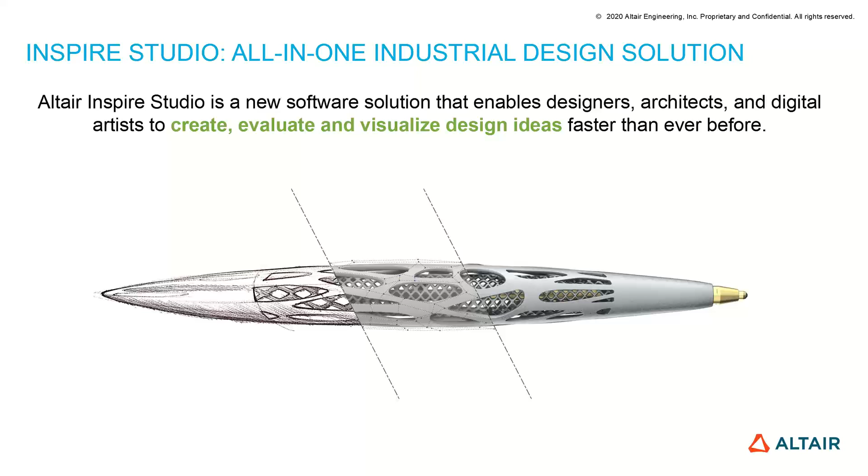It just allows you to create and visualize designs faster than most of the tools out there, leveraging the construction history and a mixture of tools that are available at your fingertips.

Now, you might have heard of construction history before. How is it different from other products out there? Yeah, there are many products that do surface modeling, but what they're lacking is the mixture of all the tools in one program. As I was saying, you can do sketching, surfacing, solid modeling, polygons which is basically mesh modeling, and you can also create renderings and animations within one single program. I think it brings tremendous value for the price being offered, and it'll probably soon go up, so I would probably jump on this offer.

Moving to the program itself, there are going to be a few short videos in the beginning, like this one here, just showing you the interface, but I will jump into it more in depth. I'm going to play this quickly, which will show you the user interface and the way you can edit some options to change your design on the fly.

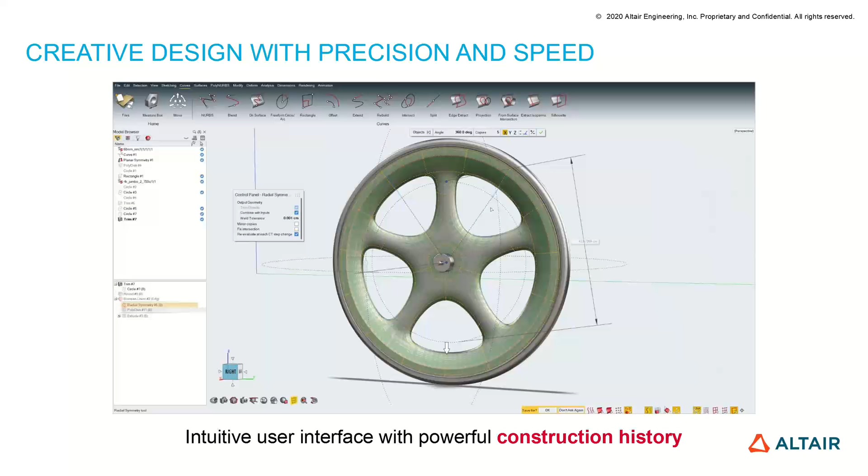Here, one of my colleagues is working on PolyNURBS that have been created in a radial symmetry around, and he's changing the number of spokes and the size and whole shape of the spoke itself. A very quick example, but the main USP here is that you can go back and change things really quickly and intuitively.

Moving on to something else, we've been improving the user interface and the experience since 2019, and it's not done yet. We are really putting in effort to improve it every day. So the images that you see here might look slightly different from what I show you, even in terms of colors and the look and feel.

Here you can see some elements I wanted to quickly highlight. The overall look is more traditional in terms of having 4 modeling views and having your model browser—that's what we call it. You're basically looking at a scene on the left with all the other tabs and windows collapsed, and all the tools at the top. What we're striving to achieve is the ease with which you can access all of these and create the model, without making it very busy.

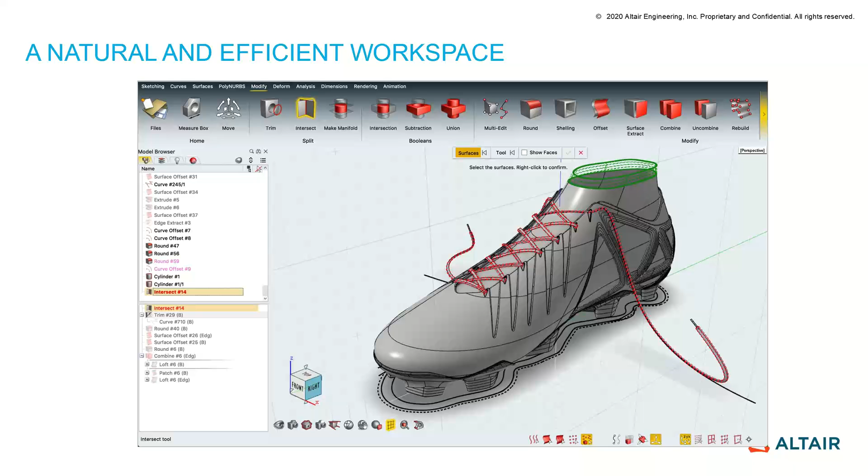I will run you through all of these one by one, but for the time being, we'll quickly jump on to some additional advantages of incorporating Studio in your workflow.

Traditionally, if you come from a background in CAD, you would be used to sketch planes and sketching. So we have included that in the latest version, which was a big step forward from our initial philosophy of just creating sketches in views as opposed to on planes. But we realize a lot of our customers are more comfortable sketching on a plane rather than in free space, so we have added this as a new option.

For those of you who are not very familiar, Studio is actually positioned in a way that it can leverage creation of very organic shapes. If you take other programs, you would probably need a plugin to get this sort of output, but we are placing Studio as one all-in-one solution.

I will also show you how you can use polynurbs to come up with really cool shapes. Here I have another example of a car body that was created completely using polynurbs. A lot of design studios are leveraging this to come up with quick concepts in the first few phases of development, wherein you can edit things on the fly before you actually go and create the full-fledged Class A surface model. This is also very helpful if you're running some aerodynamics tests on these shapes.

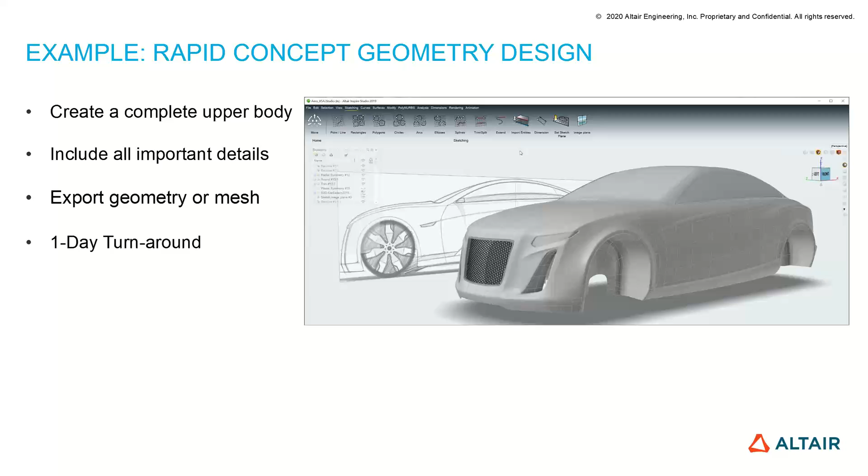We are also working on making it easy for you to export such data into Altair's other products that allow you to run such simulations. So you can really start with the right design at the very beginning.

Here's another quick video showing how we have some specific tools for creating wheel arches and side profile, and how you can build upon that with very specific tools for edge modeling, vertices modeling, and also face modeling. This is an added benefit because you can mix and match these tools. You're not really stuck with a mesh just because you started with a mesh. You can use a mesh along with surfaces and solids, which really brings a different type of advantage because you're allowed to be flexible.

Here, even though he's starting off with a very rough model, you can keep adding details to it, use specific measurements to move vertices or faces around. We also added symmetric modeling here - you can see he's just creating one design feature on one half of the model, and everything updates on the fly.

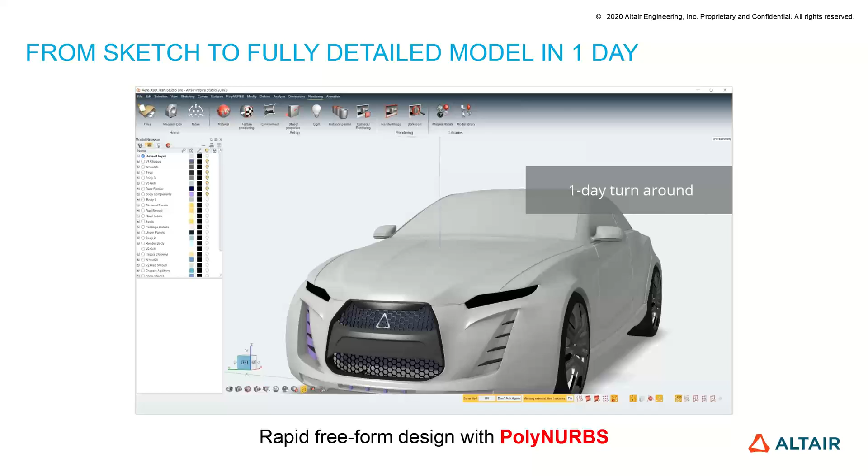This is a very trimmed example - of course this isn't happening at this speed. It's definitely happening fast, but not at this rate. But the result is pretty much instantaneous with construction history, especially with polynurbs, because it's so light and there's no real history in it. It's just moving points based on some underlying curves - here he's aligning it to a curve. We are targeting like a one day turnaround as opposed to several days or even a week.

So let's jump into the program itself. I actually opened something before you got here, but I'm going to keep it open right now. I'm just going to fit some of the scene - I opened it to show you the different kinds of lighting we have. I'll eventually get to that, but the look and feel of the program is very straightforward. All of your tools are on top here, put into something we call ribbons. So this is the surfaces ribbon, and all the surfacing tools are here.

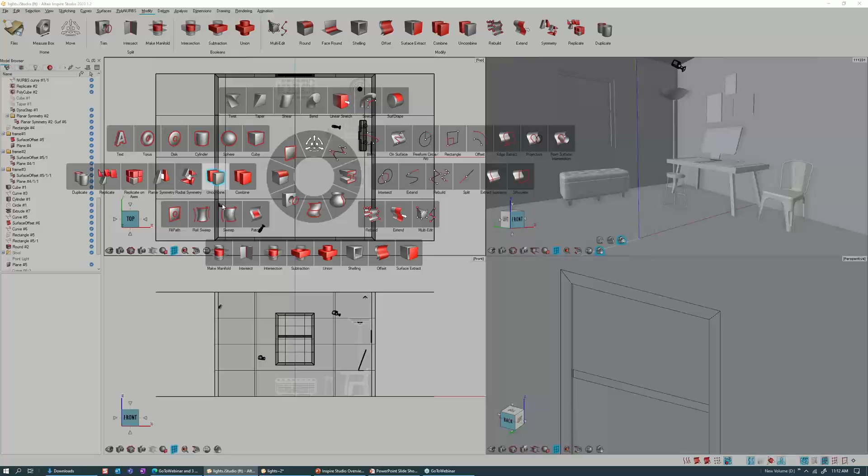If you go to modify, you can see some familiar tools like creating a round or a fillet, or if you call that, intersects and trims. You can also go to the sketching tab, which gives you all the tools for sketching and so on. So you can either use these to figure out what you want, or in 2019 we added something called a tool belt. When I do an alt right click, I can quickly see the tools I need to access. Let me save this and start a new scene.

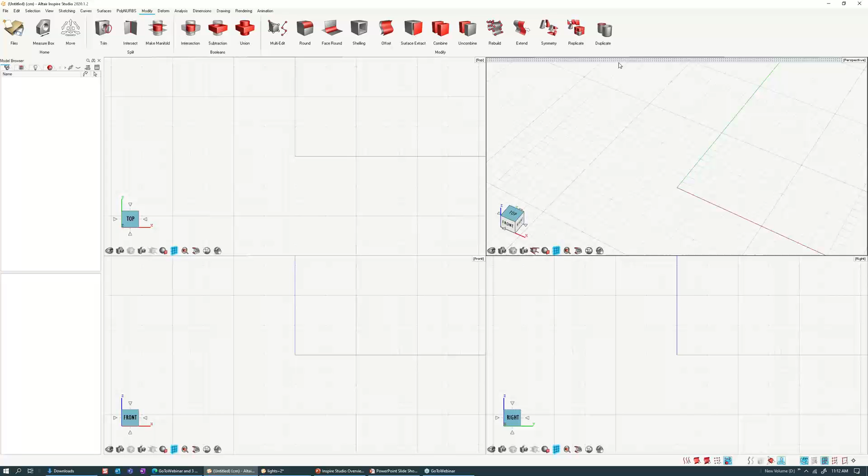As I was saying, the look and feel is pretty much traditional with 4 cameras: top, front, right, and the perspective, but you can pretty much work in the perspective all the time. For example, if I'm here, I can use this cube to switch what I want to see. And if I want to go back to my home view, I just hit the home button.

So you can start with the sketch or even just a basic curve. Here, I'm going to start in the front view. I'm just going to create a circle. You can go to freeform circle and just click and draw, and specify the exact size. So 8 centimeters is fine. Then if you want to create a copy, just Control-C, Control-V.

All of your model, your scene basically sits here on the left side. If you double click on any object, you can edit it. So let's quickly change the size of it, let's say 10. And what I want to do is create a sweep.

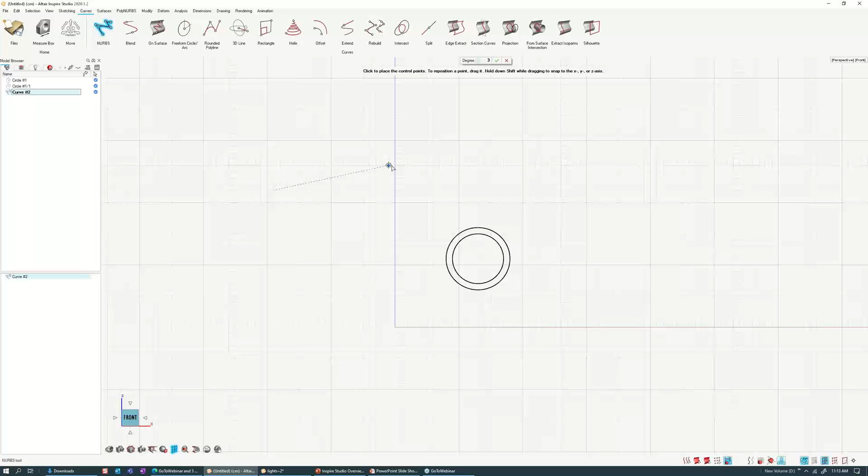I'm trying to create a hair dryer here, so I need a path curve. I'm going to quickly draw a NURBS curve, and I want to sweep these 2 circles along this path. Even though the circles are placed in the front view and the sweep has to go from left to right, everything is going to be fine because we have options to do that.

So if I go to sweep, it's asking me for profiles. I'm just going to select 1 and 2, right click and say path, and select this one. By default it'll try to do something that's not correct, but you can auto align it to bring it to this position here. So you can see that it has created a sweep for us.

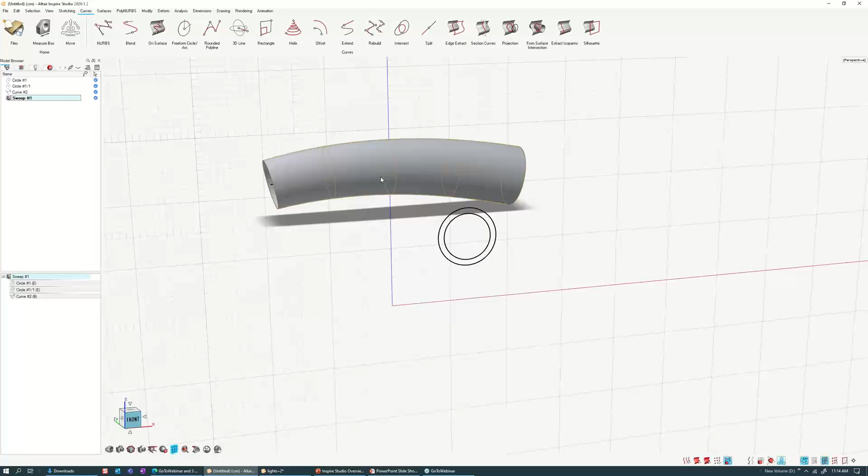When I was saying construction history, it's mainly the ability to change, right? You would want to go back and do something without having to redo it. So here, let's say I want to add another curve, a profile in the middle that's larger than the other 2 curves.

All I have to do is create that new profile. Let's say it's about 14, slightly larger. I want to place it in the middle here. Traditionally, what you would have to do is delete this and redo the sweep again, but not here.

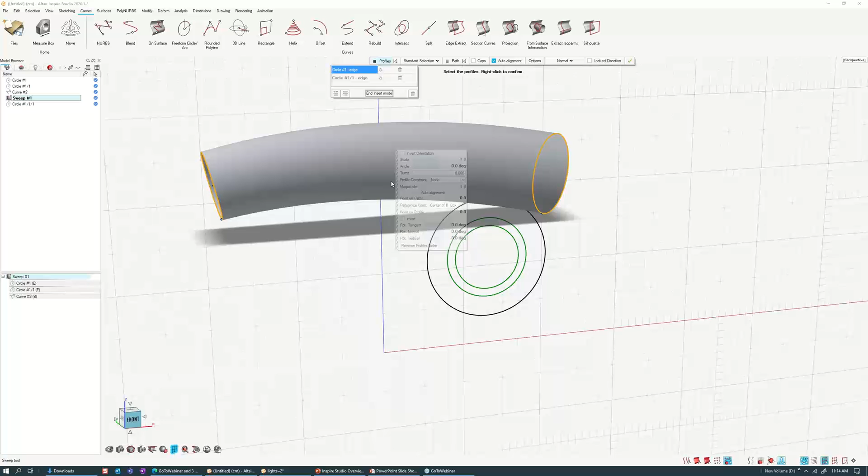You just double click on it. If you go to the profile list, you can see there are 2 curves. I just want to add something in between, so I select the object and say insert after this entity. When I select insert after, I can click my new circle and it's going to throw it in the middle. That's it, I hit the green check mark.

And there I am. I've gone and edited something I already created by inserting objects into it. You can even go and change the shape of the curve, and it's going to update. Let's just make it like this.

I'm hitting 2 on the keyboard for surfaces, 1 for wireframe, and so on. So now that we have this one, let's just quickly do... you can just select these and move it out here.

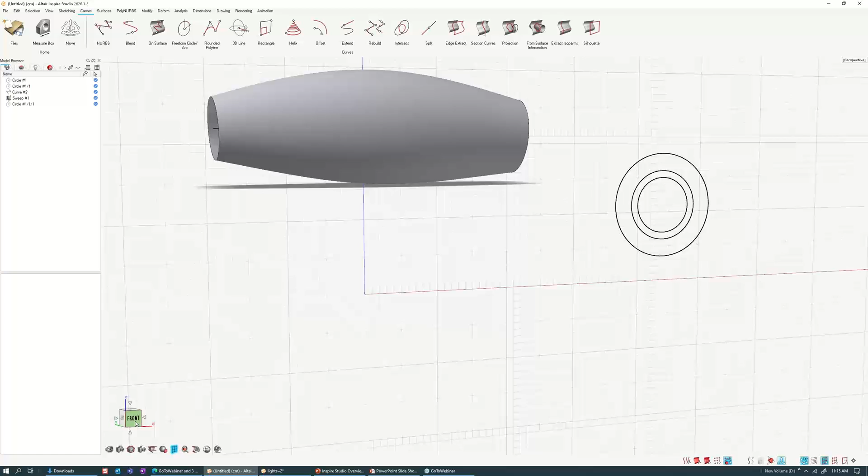Let's start by creating the handle of this, right? So again, for the handle, I would just start with another NURBS curve and throw it in here. Even after you've created something, a NURBS curve, you can add additional points by using these graphic handles. A lot of these are intuitively designed so that you don't have to click additional buttons.

Once again, here I want to sweep something. I can either do a single sweep that will keep the same profile, or two of them. So I'll do alt right click, go to sweep, and select these two, right click, select this one, auto alignment. Here I'm not happy with the direction, I want to just reverse it, so I can do reverse the profiles order.

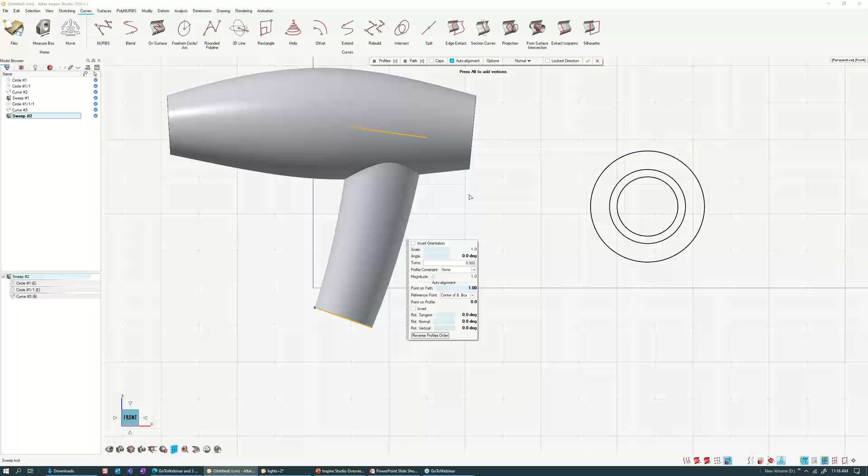So now that we have this one, I'm going to create an intersect. A lot of these tools are available here on top, or you can go to Alt right click and figure it out.

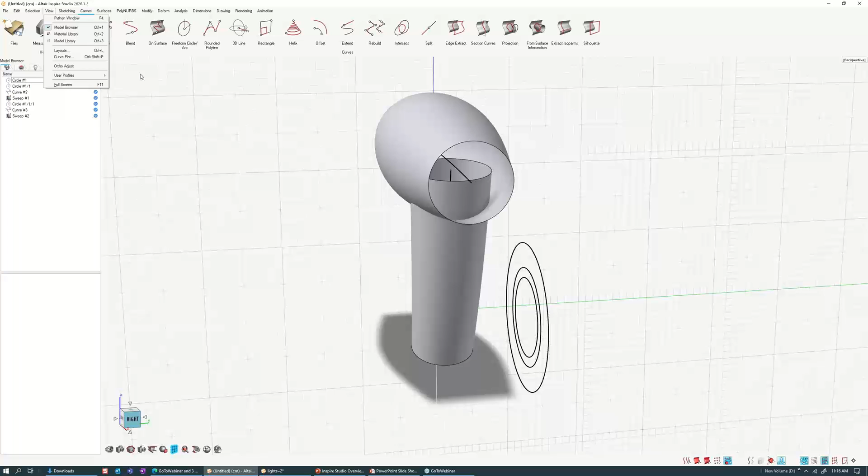If you want to edit the tool belt, you can go to File, then View, and change the tool belt, or go to Help, Customize tool belts. Here we have all the different tool belts, starting with Alt. Shift Alt is for sketching. Control Alt is for polyNURBS, and you can even hold Control Alt Shift and right click to throw in more tools and make it your own.

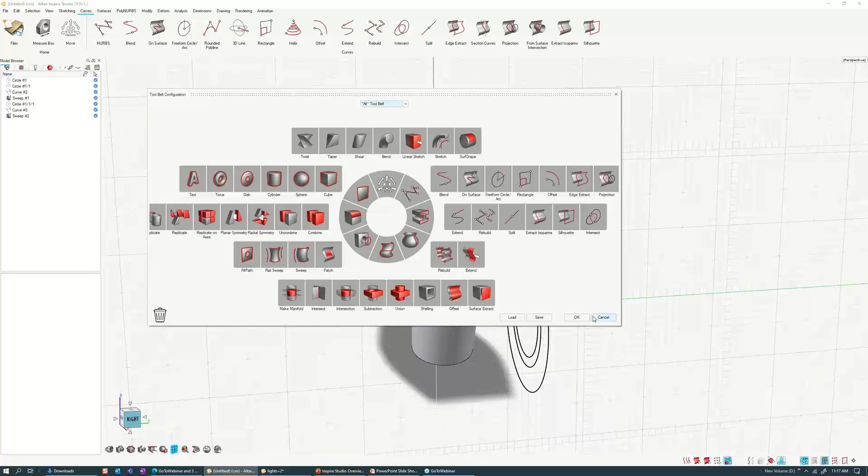At the moment I'll not change anything. It's pretty easy to reorder these, you can just drag them apart. If you don't use a tool very often, you can just drag it into the trash can here. So I'm not going to save it.

So here I am, and I want to do a quick intersection. I'm going to say intersect this surface and this surface. I right click and it shows me what I can remove, and I click on it to remove it. When I right click and swipe, I finish the operation. Some of these objects are created as a single surface after the operation is complete, and intersect is one of them. So here I have an intersect.

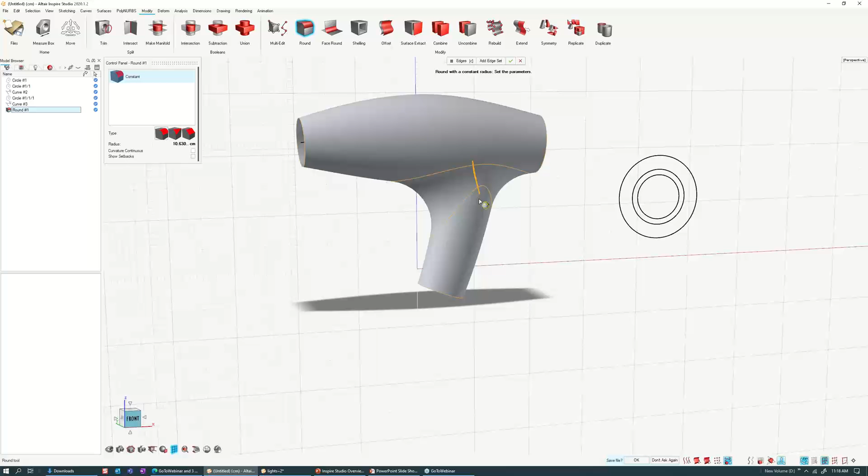Of course there's a common edge here, and I can throw in a radius. I can add one and increase it, force curvature, and now I have this main body that I quickly created in a matter of minutes, and I can change things even after I've created them.

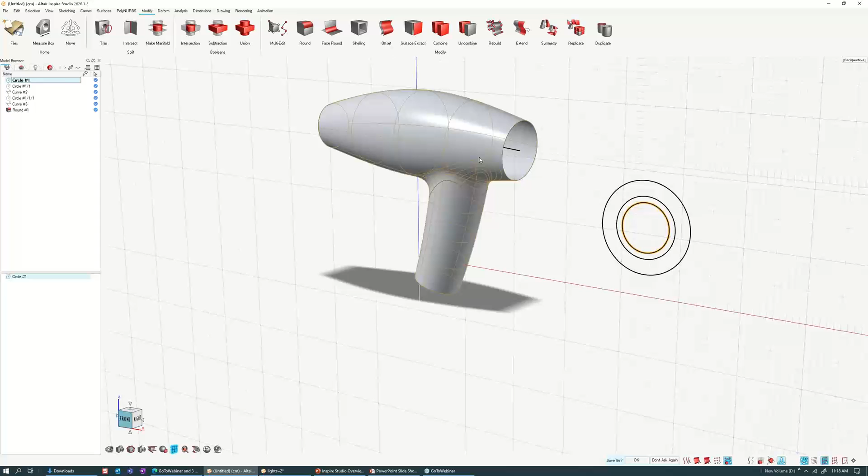When I select an object, on the left side it shows me the way I created it. That's what we call the history, or the construction tree, or parent-child relationship. You can drill down into it to find what you want. Let's say you wanted to change one of the first things you drew, the body of this upper half, which was the first sweep we created.

That's sweep number one. You can go into that and say, I want to change the size of this opening in the front here. All you have to do is double click on it, and it'll tell you exactly where it is. When you type in 6, it changes it here. Or let's say you make it 7. As long as the program can figure out and not break any intermediate steps, it's going to give you the right result.

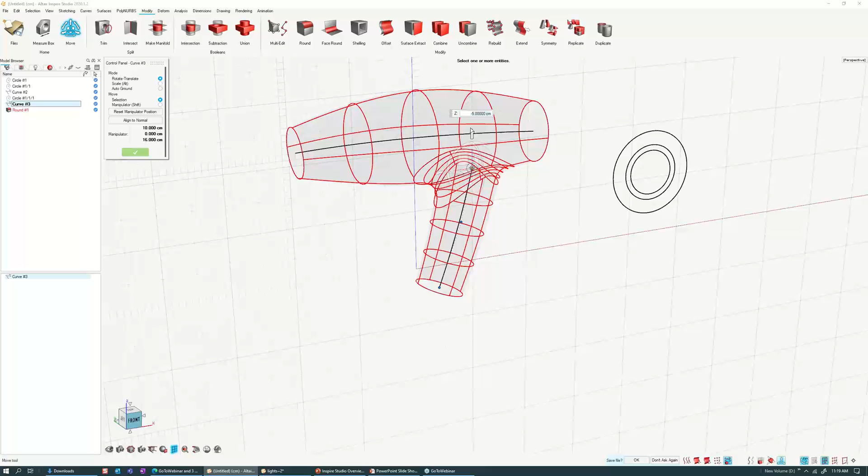But there could be times when it might break, so I'll show you one such example. If we hit 1 on the keyboard, let's say this curve was not all the way inside. If I move it down, at some point the program might break the tree because there's no valid surface that could be generated, but it'll still give you the last valid surface. Here I moved the point of the sweep line much below, and when I select the round, I can see that the round is the one that failed, nothing else.

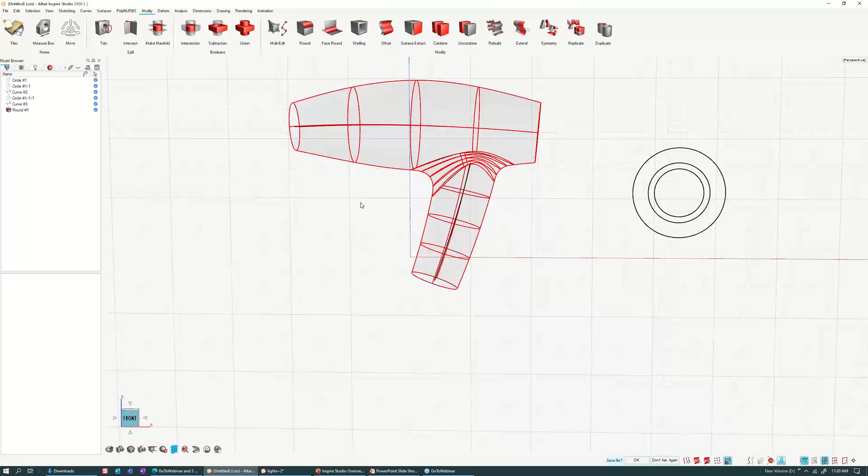I'll have to redo the round, and most likely the fillet failed because the radius size is too much. We can try to reduce it and see if that works. Maybe curvature continuity isn't possible, so we can debug it that way. When something fails, you can easily figure it out in the program itself. I removed the round, and I can add it again if you want.

Let's go to the back here, and this is where I want to show how you can quickly create solids out of surfaces. Okay, so here this is a sweep. I could have closed the openings of the sweep in the sweep command itself. If I double click on the sweep, I have a caps option, and if I cap it, it's going to cap. But in many cases you wouldn't have capped it, or maybe it's not conducive to cap, so you end up with an opening. So how do you close it?

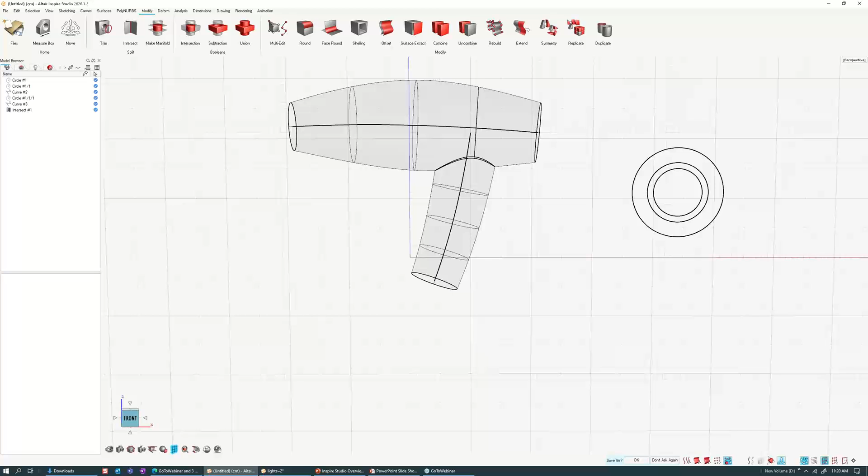It's pretty straightforward, you go to Patch. It's a tool to patch edges, so you can patch this edge, and the same way you can patch any opening in the model. I'm going to repeat the last command, which was patch, and patch this one.

And for the last part, I will patch this one. So let me patch this. Right, so I have these 3 patches that are all surfaces and this main body. So at the moment, this is not a solid object, it's just a bunch of surfaces.

In Studio, you get an option to convert these kinds of layouts, where surfaces are at least tangential and have a closed edge, into a solid. It's like stitching these edges, and that's what I do with a combine tool.

So when I hit combine, just select all of these. So I have this one and this one and the last patch, and I right click. Combine does something pretty cool, it stitches everything and creates a solid as long as there is no gap. It's not some magical tool that will heal an opening. As long as there is no opening, it's going to create a solid.

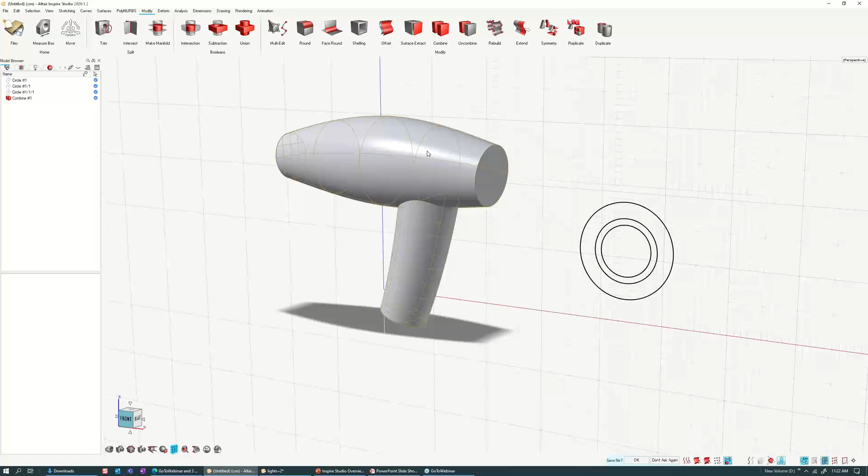So how do we check it's a solid? I would want to trust the program, but I also want to make sure it is closed. In this case, we can go to the analysis tab, which has a bunch of analysis options like drafting, tolerance check, the volume, and some continuity checks. All I want to know is, is it open anywhere? Because if it's open, it's going to cause some problems downstream. So that can be done using the tolerance check. When I hit tolerance check, it says okay, there is no problem, this is a closed solid right now.

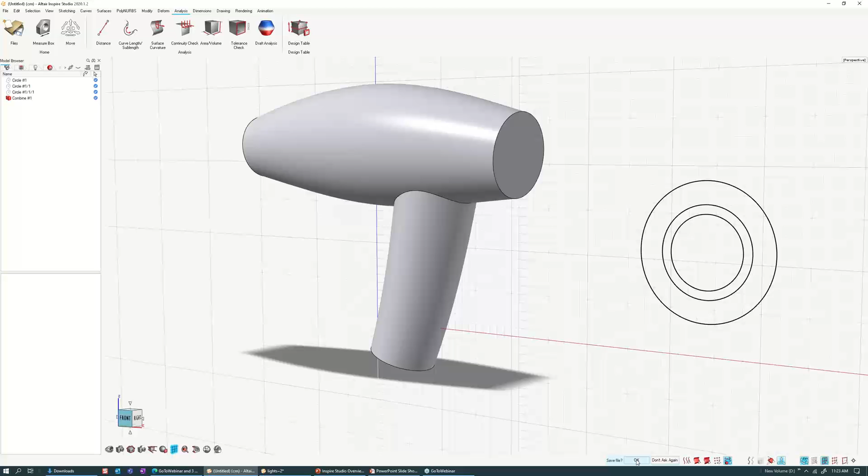So that's the way you would quickly perform some analysis on your object before you move on to the next one. Here you can see at the bottom there's a small pop-up saying you want to save the file, because I didn't save it, it's going to ask me. You can say don't ask me again, or I can just say okay, in which case it will open the last file that I used, and you can save it here.

Some of these preferences can be edited in the file preferences. When I go to general, I have auto save enabled, and a 5-minute time interval has been set. I use this so it reminds me if I start something and don't save it. There's also some safe saving and crash recovery options you can turn on if you're working on something very important, or forget to save it often, or a very large file susceptible to slowness or integrity issues. But at the moment, we are doing fine.

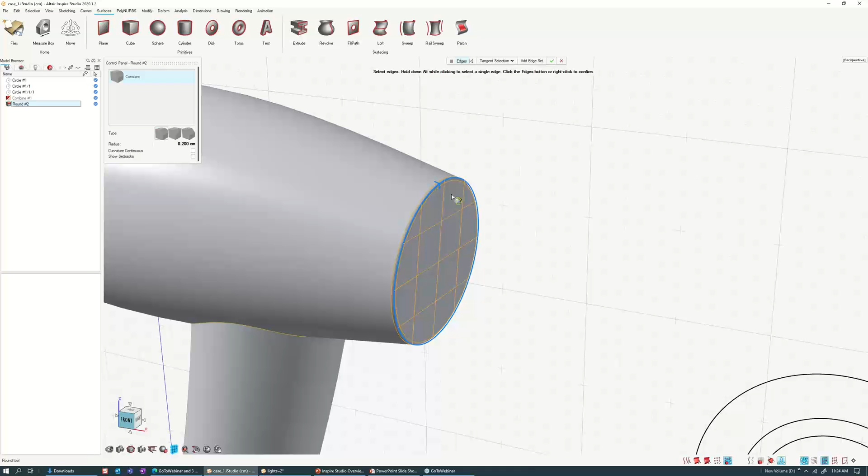So we have the surface, and now you can just think about what else can we do here. I can add another fillet at the back here, right click, and then increase the size. 3.5 is fine. Okay, so now I want to create a pattern, or create some holes in the back here for that exhaust.

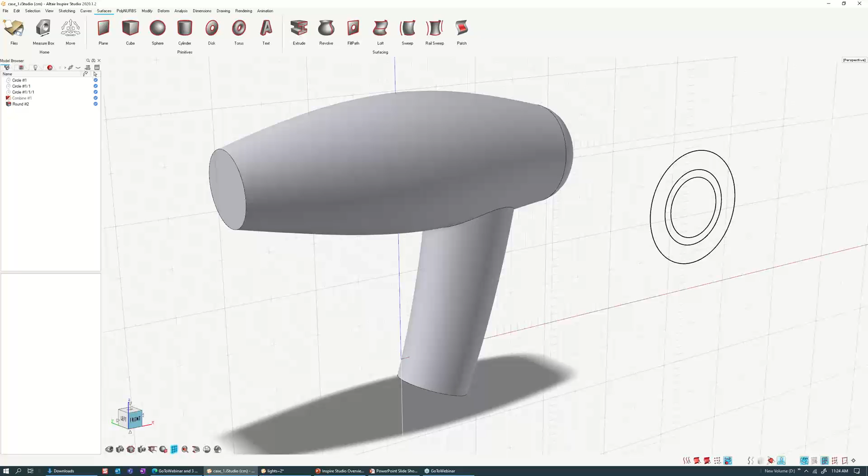So just stay with me here, because first I want to create a shelling of this. Now I'm going to shelling, and I'm going to select this, so it will create this shell for me. If you want, you can even shell this bottom part so it's a complete hollow piece, and you can give the exact thickness.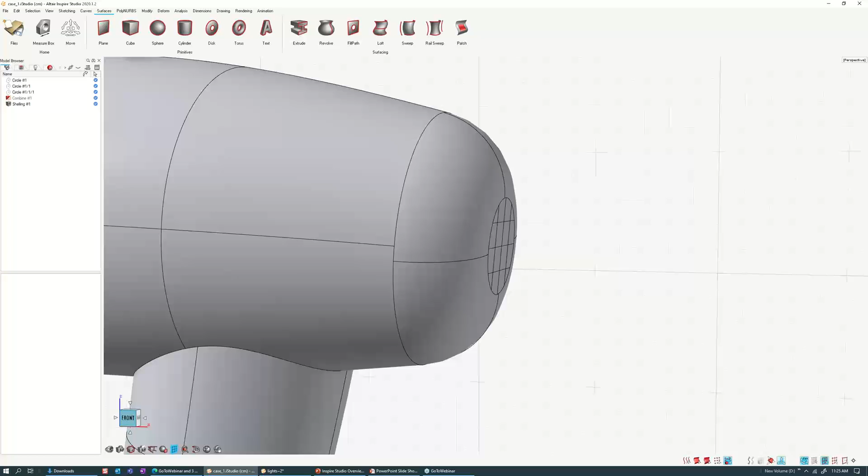And now I want to use this back part to create a pattern, like a circular array of holes. So how can I do that? I just want to first make sure that I can use one of the edges here, so I'm going to just extract one edge here. Let me go to curves, and I can edge extract this one.

So I have this edge that I've extracted, and now I want to create a sphere, just a simple sphere of maybe 1.5 centimeters. So I want to just create a pattern of this along this circle.

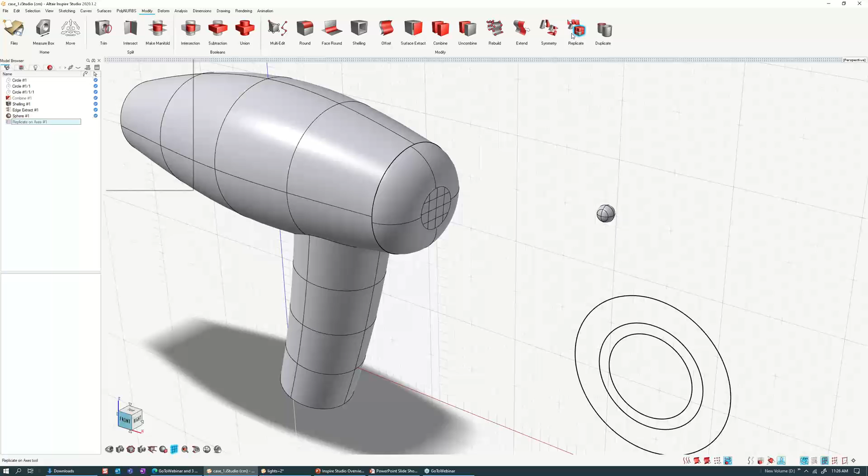So there are some pretty handy tools for replication. I can go to modify and quickly choose replicate, and the object I want to replicate is the sphere. When I do a right click, sorry, I didn't click the path, let me redo that. Replicate object, and the path is this one.

You can see that it creates a replicate along the circle, and I can increase the number of copies like this. And although I wanted the replicates to be further out, I can actually do that by moving the replicates themselves. When I click on this small graphic handle here, I get a chance to move them anywhere, as long as they are within the surface.

So I'm just going to go to the front view. I'm going to turn off the grids here, so I have grid snap. And also, I'm going to disable all the snaps because I don't want snapping to work at the moment.

So I'm just going to pull it out here and right-click swipe. I want to make sure this is a combined output, otherwise all of these will be separate spheres. So I'm going to combine the output, and there you have a quick replicate.

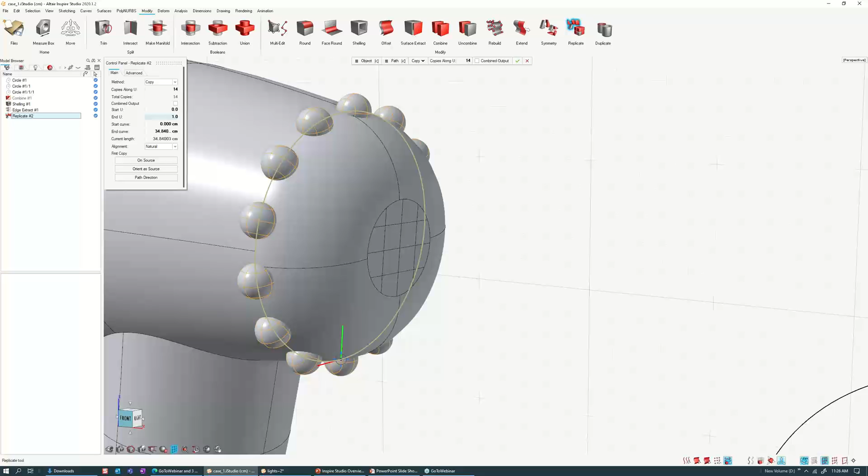And now I can do a Boolean subtraction. This is where solid modeling comes into play. All this while we were working with surface modeling. When we created the main body and shelled it, it became a solid.

So from now on, we need to use solid modeling techniques. I'm going to do a subtraction. This surface, right-click, and objects are this one, and it's going to create a quick subtraction of this one. Again, there is no reason why you just shouldn't be changing this.

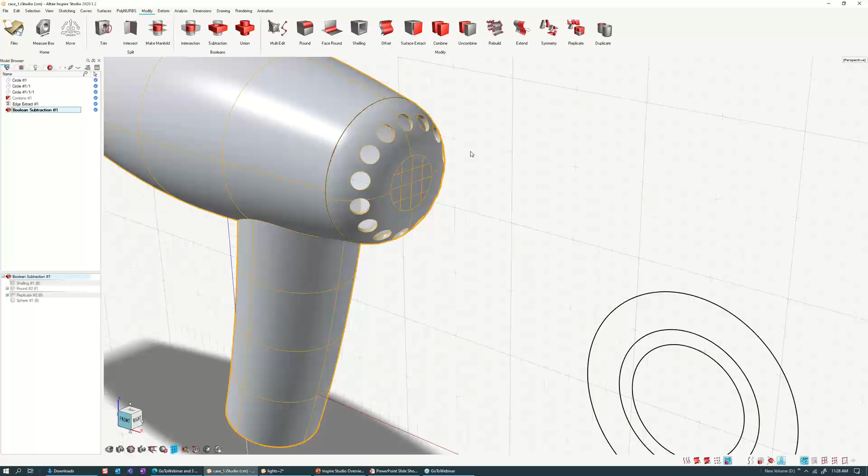I feel like changing it now, so I'm going to go to the sphere. I'm going to change it to 1. It made the hole smaller.

So now I just want to change the replicate. I'm going to double click on the replicate and change it to 25. So now it's going to make all of these changes without any problems.

But now if I change the size of the sphere, of course, it's going to create some problem because it's going to merge all of these holes into one.

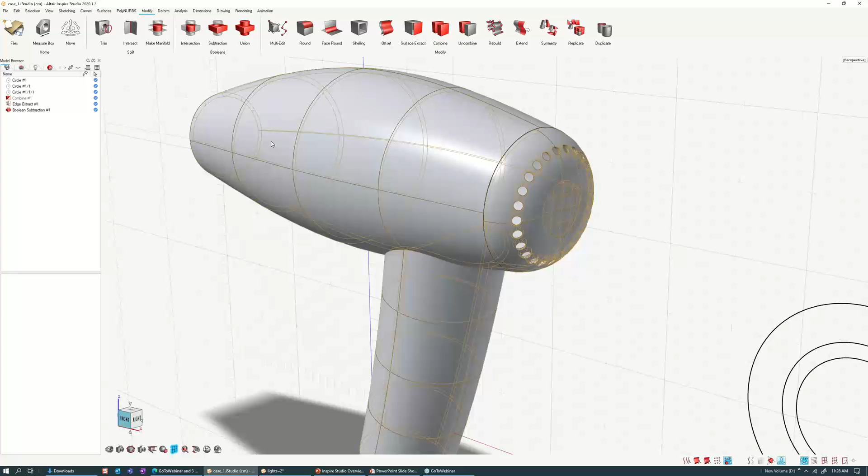Now, if you look at this model browser on the left side, it looks like, hey, where are all the objects I created? It looks like there are only 5. So what we are trying to do here is to keep a very clean look by showing you only the top level objects.

If you come from the previous version of Studio, which is Evolve or Solid Thinking, you're used to seeing a very large tree that is chronological, which means we just keep showing you everything that is being created in the scene, no matter where it is in the tree.

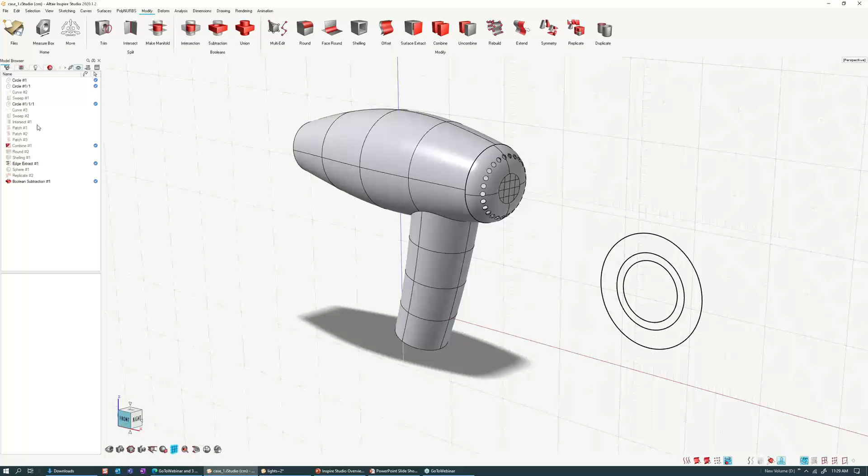If you're somebody who likes to see everything in your scene, you can just click on this Show Hide All Source Objects. When I do this, you can see everything you've created so far. It's chronologically placed, so the Boolean subtraction is the last thing you did. But if you turn it off, it's going to be the last thing you did, but it's not very clear what all surfaces are being used, or what curves were used, and so on.

So this is just a quick way to show you how you can do surface and solid modeling. Now let's jump into sketching quickly. So here I'm going to the front.

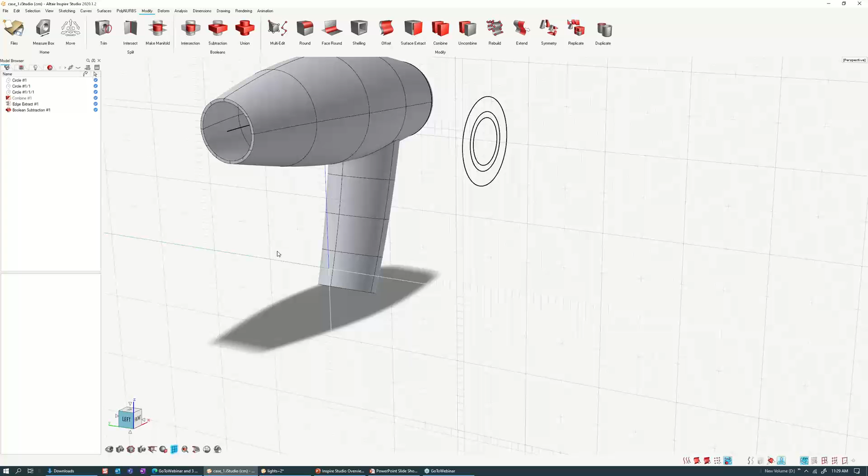I want to sketch something here in the front, right? So I'm going to sketching, and you can just start sketching by creating a sketch, but let's start with just a square or a rounded polyline. Either one is fine. So I'm going to start with a square, rectangle, and I'm going to choose the front view.

Sometimes if there are objects in the way of your mouse pointer, you can always just move them out and then select it. So here I'm going to place something along this center line, like this.

You don't have to fully constrain sketches in Studio, so that's not a prerequisite, but if you're somebody who is more comfortable doing that, you can constrain it.

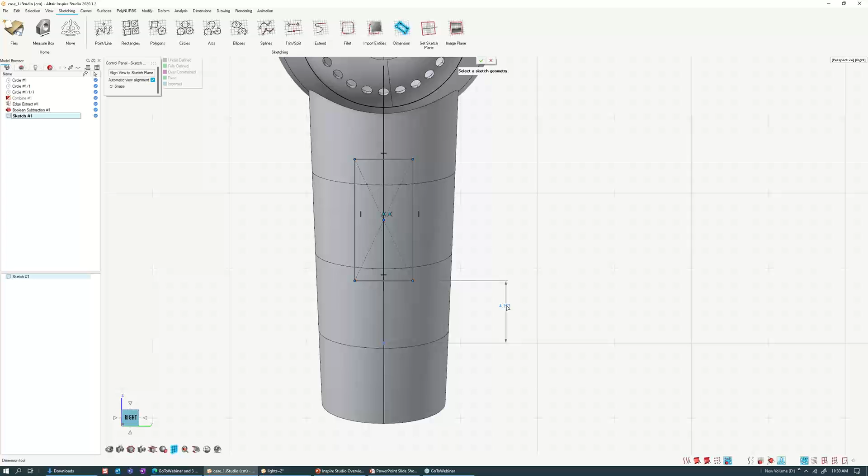So let's say I want this to be 4 centimeters from the bottom, and this is like 1.8. Let me give the size of this, make it 2.5.

I apologize for any screaming and shouting that you might hear, because my son is at home.

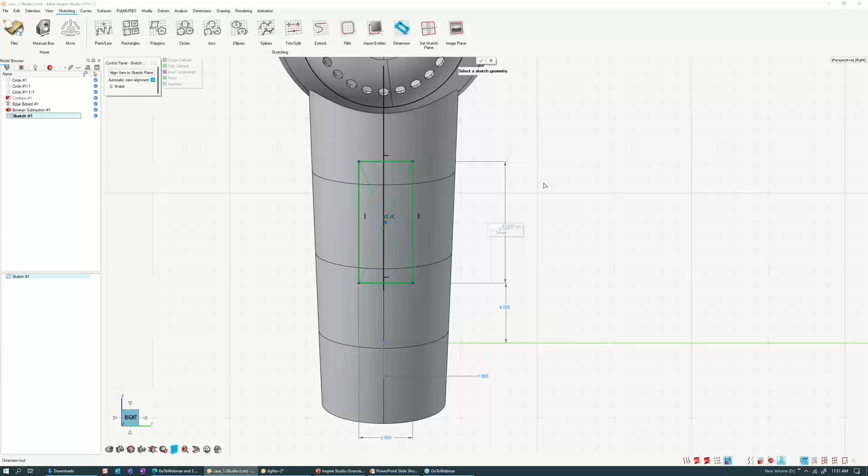So here I have, let's make it 6. And the last thing I want to do is align the center point with the axis, so I select both of them.

I'm going to delete this 1.85 because that won't let me align it. So I'll select the center of this square, hold Control, select the origin, and make it horizontally constrained. So now I have all of these.

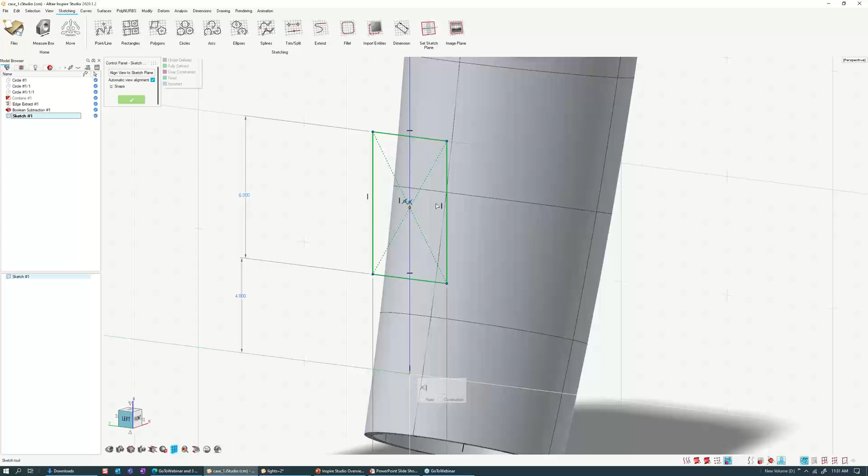This main sketch here, I can add fillets to this sketch itself using the fillet option, or you can add fillets to the surface. Either way is fine. I'm going to show you the latter.

So here I want to create a trim of this. Let me use a trim command with the sketch. I'm using sketch with a solid object. I used curves before, so I'm just going to do this, and a trim by default will go all the way through.

So here I can see it's gone all the way from the front and come out from the back. I don't really want that. I want it to stop here at the front. So the way I can do it is say, give me just a custom distance, I don't want the whole side, I just want a custom distance, and I can specify it by pulling this arrow inside.

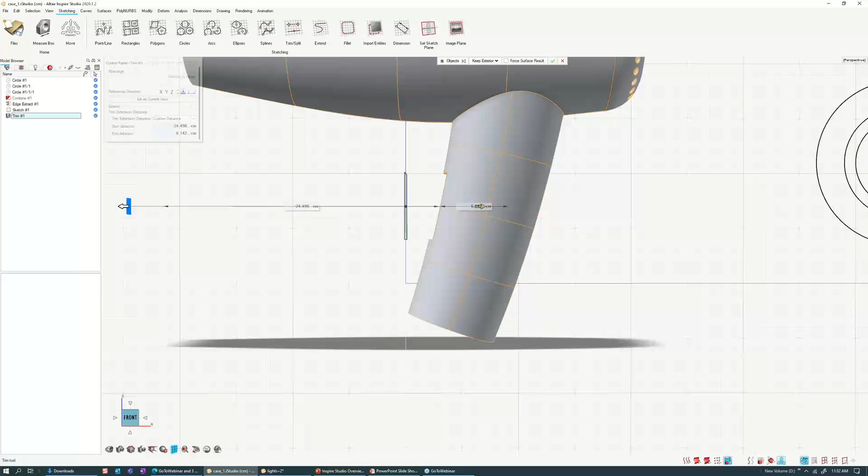So I'm going to stop at 6 centimeters from the point here. I'm going to keep the exterior, and there you go — it actually created a trim that didn't come out the other side.

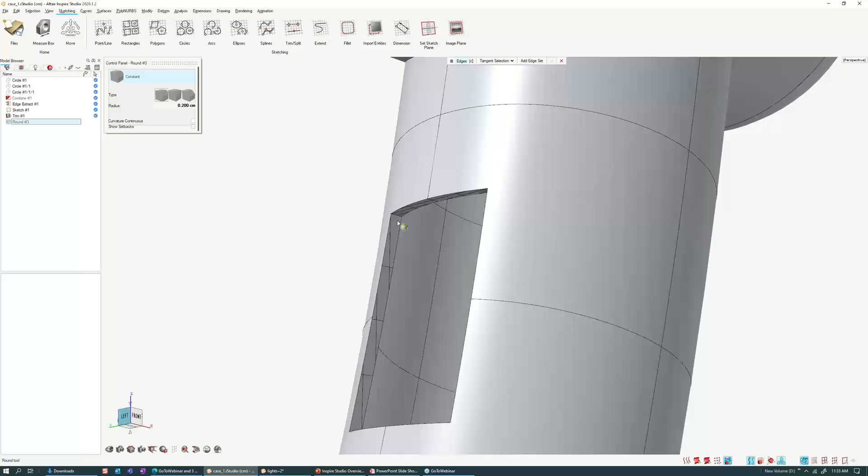In some cases, I'd like to turn off the grid because it gets busy. So I'm just going to turn off the grid, and you can add fillets to this part now. You can just go in here and add a fillet here.

If you did not want to do this, you could have added fillets to the sketch instead. So let's step back. I'm going to hit delete, go back here, and in the trim sketch I'll just say give me a fillet for all of these, and exit from the sketch — and boom, the trim updated even before I exit the sketch. So this way you can use many of these techniques.

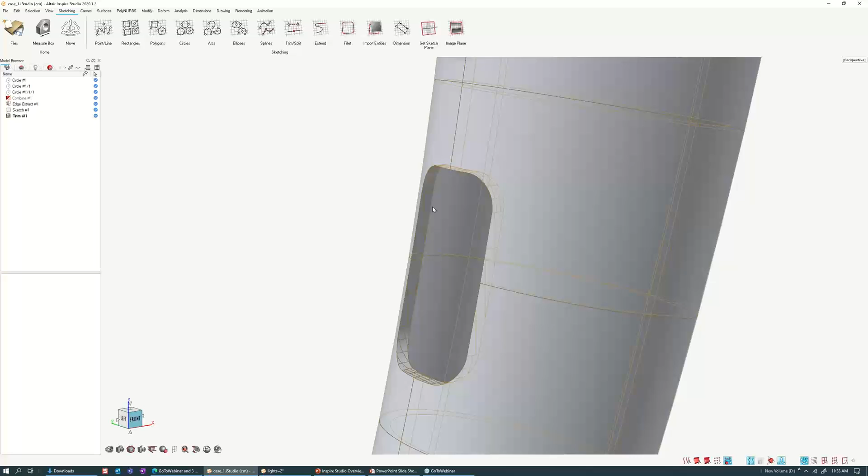Now I want to close this opening again. As I said earlier, I can use a patch here, and I select this edge. If you have internal curves, it can create something, but at this point it can't really fix this because there are no internal curves to guide the continuity.

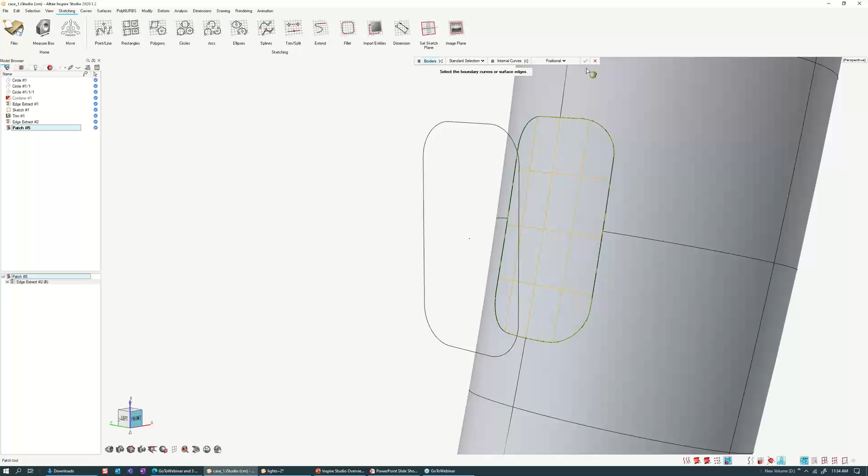But if you create some curves there, you can also patch that. Let's do an edge extract on this instead. Okay, so I created this edge. I'm going to hit Q to bring it back, and now if I try to patch this, it should give me a patch — so I could patch the edge even without any internal curves.

The reason I did this is because eventually you could create a switch here that will control the speed of the air coming out, and so on. We have a very similar tutorial in the pack, so you can run through this very easily.

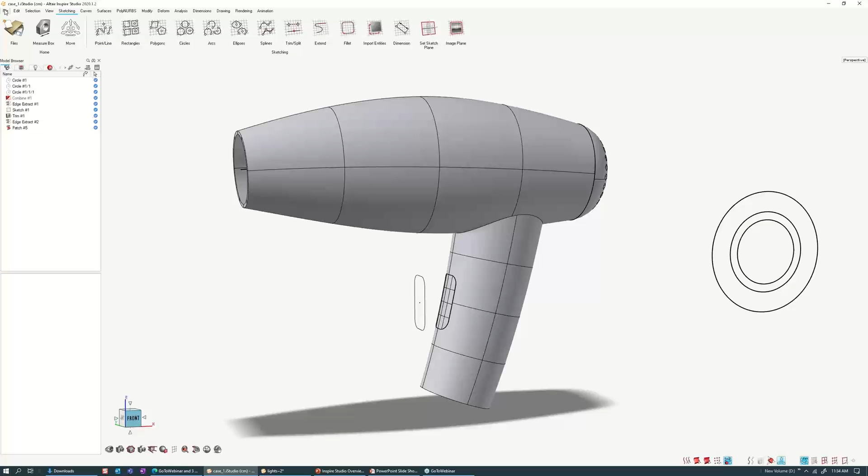Let me open that, I'll show you where it is. If you go to File, Open — let's go to Program Files, Altair — okay, I think it's in the documents, sorry. It's in the scenes folder. I'm sorry, I can't really remember off the top of my head, but it's one of the tutorials that goes through this.

So let me jump into the next part, which is the polyNURBS aspect of it. Let's say you want to create something in the front that is not a surface or solid technique, but more of a polygonal modeling approach. So you can go to polyNURBS and start working with it.

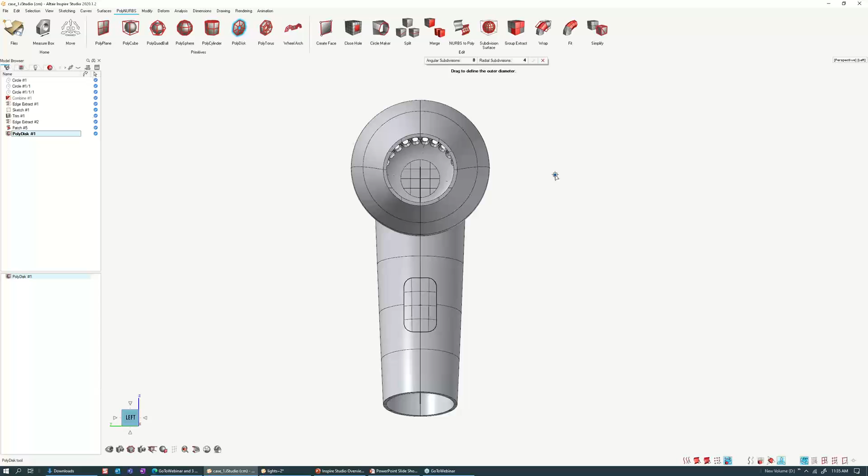So I'm going to start with the poly disk. I'll bring back the grid here, and with poly disk I'll say give me grid snapping 2, and I'll create one disk like this. Let me bring it out — so I have a disk here, and now I am working in edges, vertices, or faces.

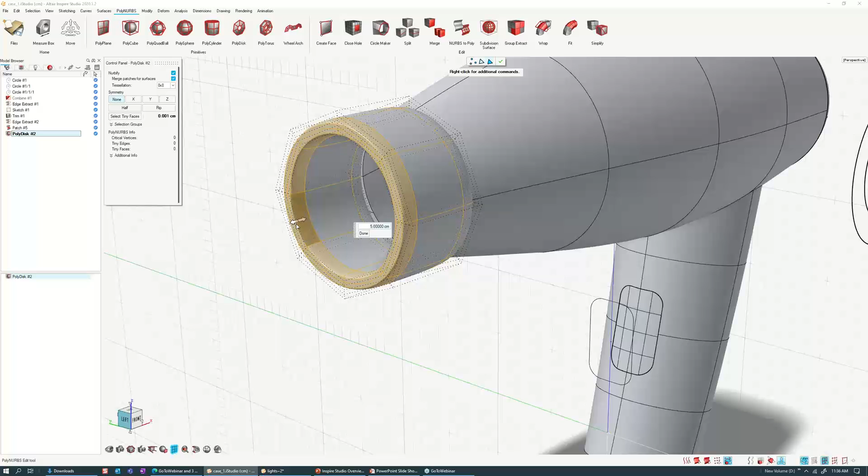So I can just select all of the faces and extrude them. I'm holding shift to extrude it, so I can extrude it like this once, and extrude it once again. So now I have these vertices that I can work with.

I'm going to right click swipe, hit A on the keyboard, and I can scale these now. So I'm going to select these top vertices, and use some of these handles to drag it down. Let me zoom in a little bit so I can just push it down, and then use this one to pull it up. Then select all of these.

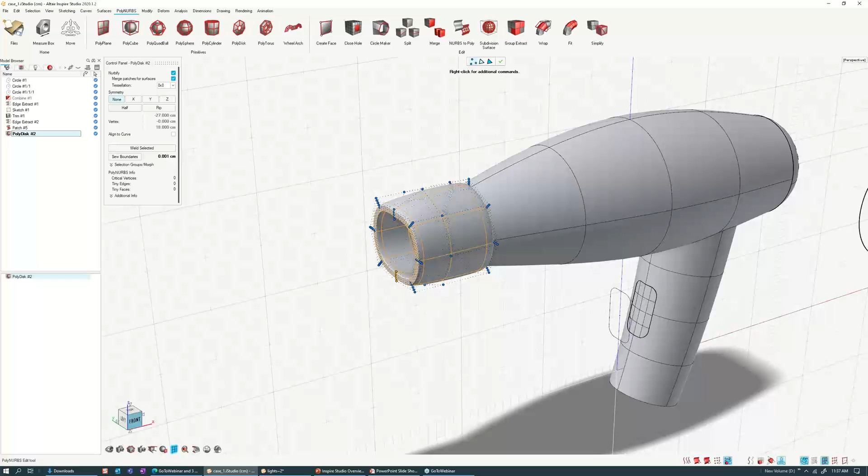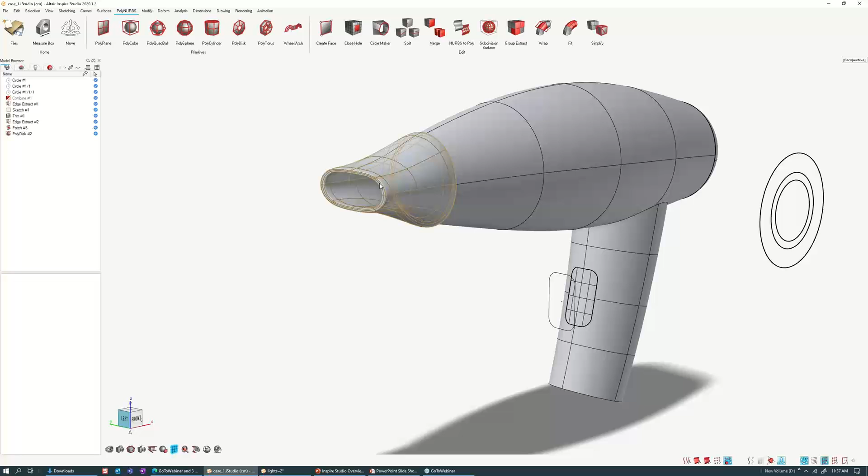And use the scale button — sorry, Alt to turn on scale — and I can change the shape of this. I can use polyNURBS to do this because it's much faster than creating a curve and sweeping it, and it gives me more flexibility. I can select only the front faces, the front vertices, and do another scale, now only in the Y direction — selecting this Y axis and scaling it.

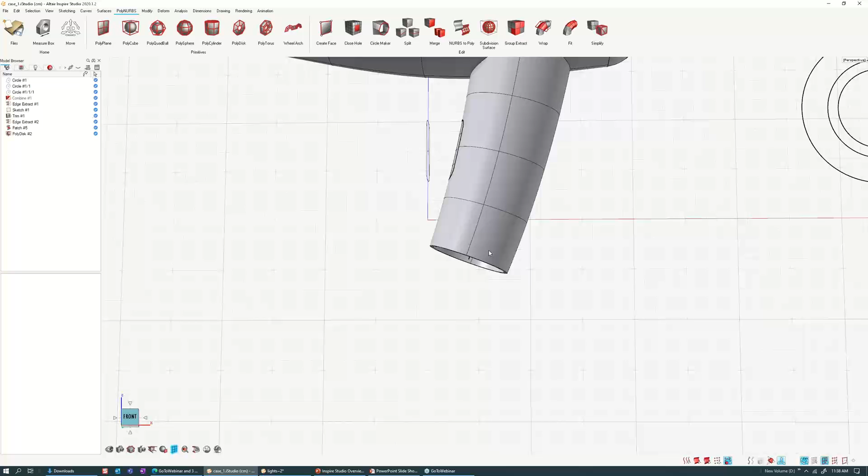You can control more of these with precision if you want to move it. So now that we have this, let's go ahead and create some other forms of PolyNURBS too. In this example, I can probably show this one, but there are some additional examples which I can show you where you can create bridges and so on. So let's save this file and move into something simpler. I'm going to start a new scene.

So here I have PolyNURBS, right? Again, with PolyNURBS, what I'm going to do, I can pretty much start with either a cylinder, a PolyDisk, or a plane. So there are many options for you to start. Let's start with the PolyDisk, as we did earlier.

Now I won't give an inside radius, so it'll be 0. If I hit D, I can right click, select all, and then I can just extrude it. So here I've extruded something, but it's just very soft looking, right? It looks like a pillow, but I want to make it sharper.

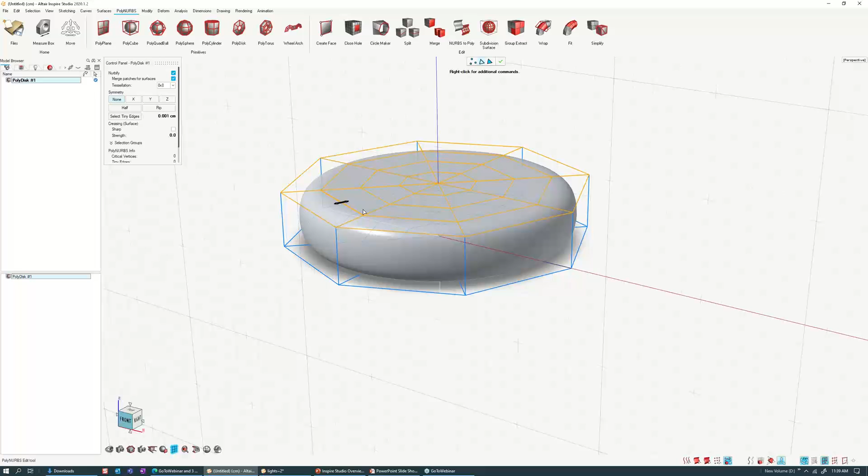So I can go to edges mode. I can select the outer edges using Alt. Here I can add a sharpness, or I can even increase the strength. Let's make it stronger like this.

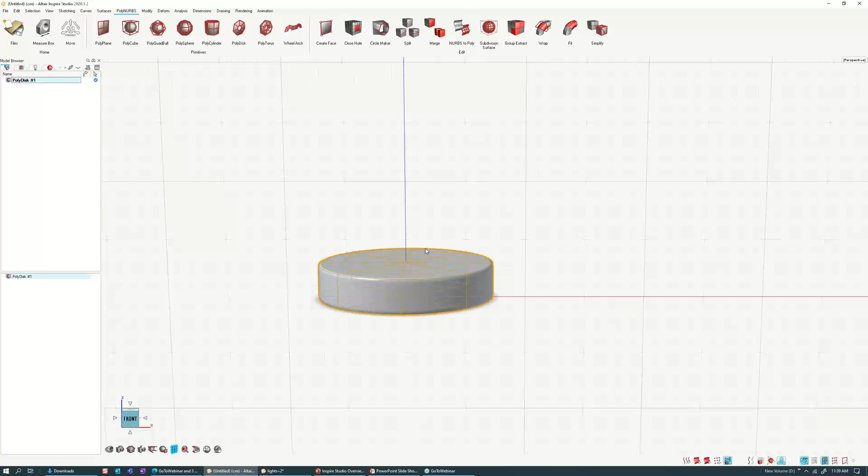And I'm going to make a copy of this - it's basically another PolyNURBS - and move it up here. And I will hit A. I'm creating something like a coffee cup with a coaster.

So it's built in. I can just move it out and go to scale. And if I want to scale it uniformly, I can just click in this XY plane and do like 2 or something. So let's scale it by 2.

Now I want to add some vertices here, right? Nothing is there between this top and bottom. So I can do add edge loop here, click and draw an edge loop. I'm going to drop one here, and say one here.

Now I want to just scale these slightly. So I will do the same thing. Go to move, then scale it, but this time I'm going to scale it by like 1.25. Okay, so I have this one.

Now I don't want the opening here - I'm sorry, I want an opening here. So how can I do it? I can delete some of these faces here.

So right now we are looking at it in a NURBS-ified mode, right? It's not like a mesh. So if I hit N on the keyboard, I can actually see how it looks in a mesh format. So this is how it would look without smoothing.

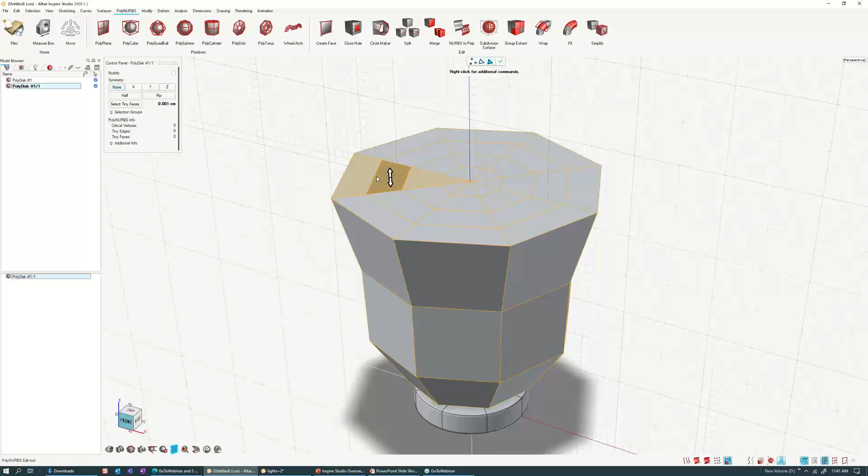So now I can just select some of these surfaces, and I can just hit delete. I'm going to just select some of these. You can even go to advanced selection and then just select the loops like this.

So there are some handy selection filters that will let you select multiple edges with just advanced selection. When you're done with advanced selection, you can turn it off, and in the main window, you can just delete it. Right, so now we have an opening, and I'll hit N again.

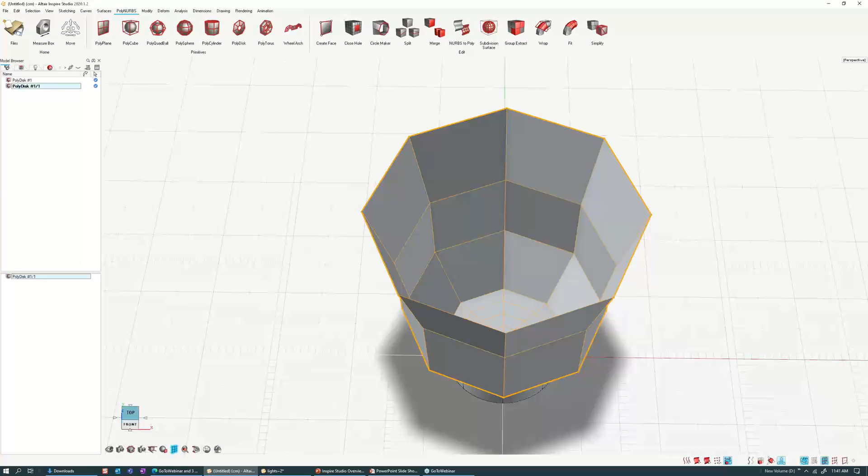So now I can select all of them and give them a thickness that I want. I'm going to just click and drag it. Let's say 3 centimeters is fine.

There was some skewness here, but I think we can manage. So I'll hit S, and you can see this edge has still retained the sharpness. So I'm going to turn it off, right?

And now let's say I want to merge these two PolyNURBS together. I just need to add them to the single object. So I'm going to merge this one and this one, so they become the same single PolyNURBS object. And I can just start by adding one more loop here.

And I can start by pulling this edge out. So basically I want to draw a handle that goes out and goes into this bottom portion. So I'm going to select both of these faces using Control and just pull it out. But you see there's a problem here.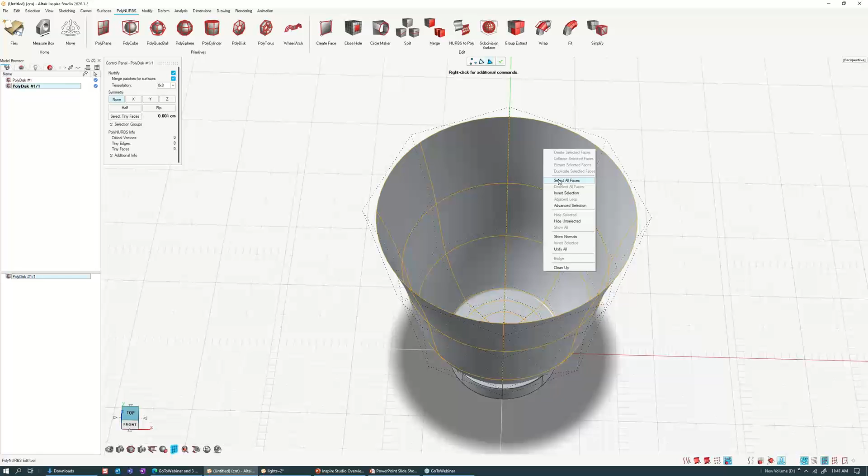The normals are reversed. So I'm just going to Control Z, then right click on this one, go to faces, select all faces, and then right click and say unify all. That means we'll unify all the normals.

Now I can do what I was showing you earlier, which is select two, and it has not done it. Anyway, so the normals have to be unified. So I'm going to just start with this bottom portion here, just pull it out,

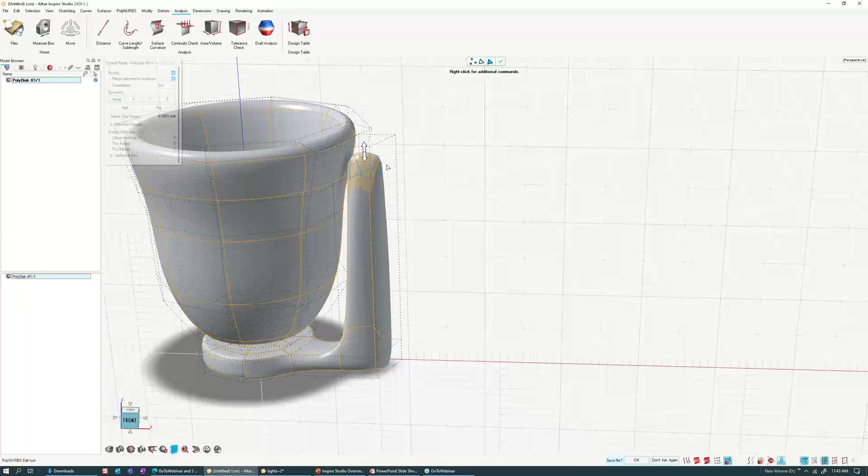and then bring the top part. We can add some more details later. So I'm going to just select this face, hit W, and just move it out. One more extrusion, and now I can just bridge this face, the one on the inside, hold Control with this, and then just bridge it.

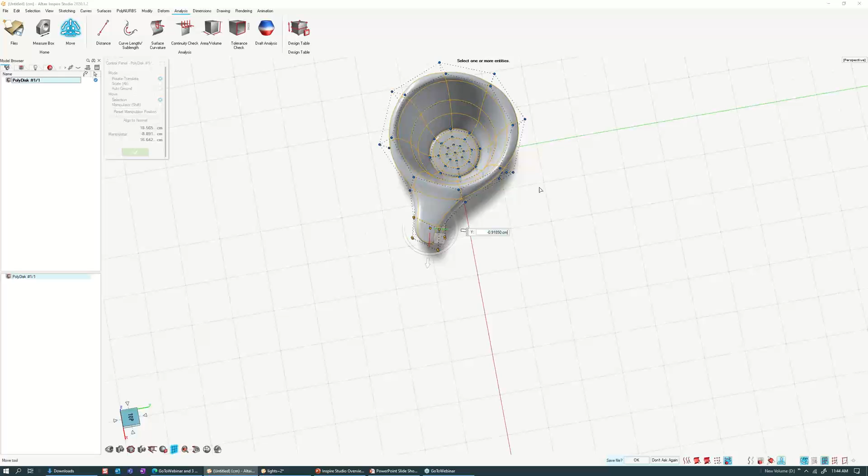So basically what I did was, although it looks a bit skewed, I can just edit the points and rotate it if I want to fix this. So anyway, the deal was to quickly come up with some designs using PolyNURBS, and this is just one example where you can do it. And the last part I wanted to show you was basically the rendering, the built-in rendering.

So I'm just going to quickly open another scene.

So here I have a scene that has multiple kinds of lights. I have some cameras that are set up, and it's basically a room.

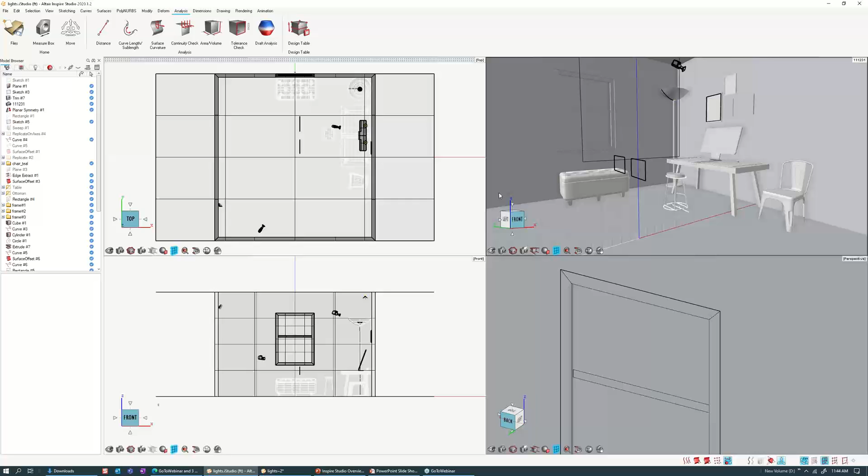I'm going to hide the curves using Q, and this is surfaces mode. When I hit 1, I'm in wireframe. 2 is surface. 3 is just a matcap, as we call it, and you can change the material cap. 4 is zebra, 5 is real-time rendering, and 6 is when you can actually look at the interactive rendering.

So I'm going to start interactive rendering. Real-time will just quickly give you a look at the materials, but if you really want to see a realistic depiction, then you can go to interactive render.

Depending on the graphics card being used, it's probably going to be faster or slower. So right now if I go to my camera and rendering, I have an RTX 4000, and it's probably the best bang for the buck. You can even use gaming cards if you have one.

Here I have OptiX denoiser enabled, so you can see the scene is a bit blurry because it's just running denoiser even in the interactive rendering portion, and it's still going to keep improving this part. You can turn it off here if you want, but then it'll just be the usual grainy way of improving.

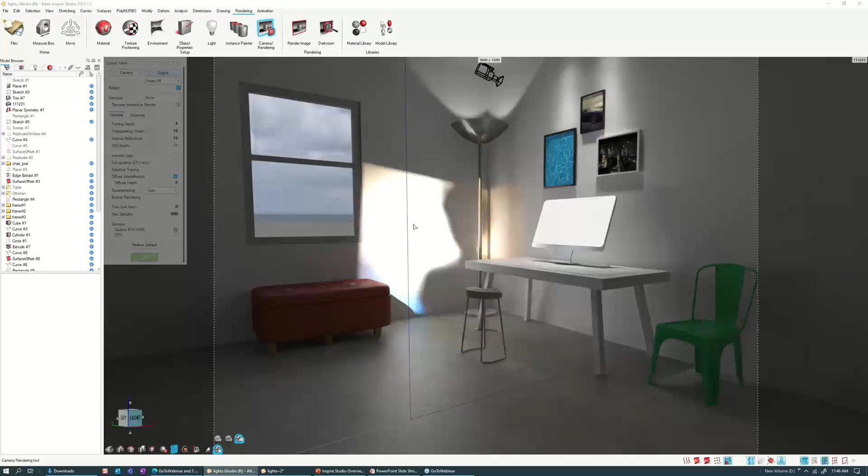So here I have already rendered the scene. I rendered it once, and I also did something called relight. In relight, what happens is you can have multiple lights in the scene, and you can turn them off and on, depending on what you want.

So here I have one light coming from the outside, which is the environment light. I have a projector light with an image of a person, so it makes it look like somebody standing. I have a regular light that is like this lampshade, and I also have a monitor that is supposedly just emitting some white light, and I have some IES lights on the top, which are manufacturer specific.

So let me go to the base scene, which is more of without the materials, just to show you how the light is going to change based on what I turn off and on. So even though I've closed the program, I'm in a different program called Darkroom, which is part of Studio. Let me just show you that.

So even though I'm in Darkroom, I can load a scene that I've rendered already. This was a scene I rendered a while ago. If I hit this, I can see the information that it was rendered in 10 minutes with 500 samples. So these are all you can set.

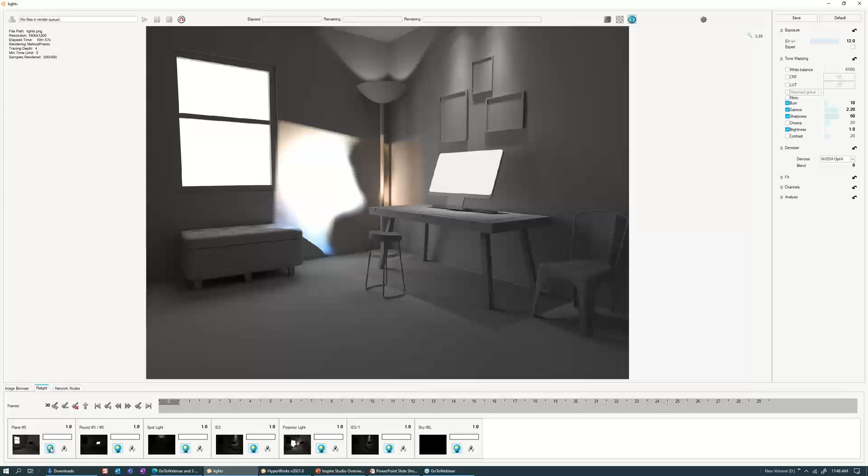Let me jump to relight here. And in relight, you can see all these lights at the bottom, right? These are all the different lights I have on the scene. You can either make each one of them turn on and off separately, or you can even make one of them solo.

So I'm going to go here and just say, make the projector light solo. When I do that, it's going to turn off all the other lights and give me just the projector light. Same thing with, let's say I want only the emitter from this window, and everything else is turned off. You can turn on lights, and if you turn them off one by one, you can even create whatever scenes you want.

So the point here is that you can add these images into the timeline. Here you can see there's a timeline. So at frame 1, I can add this, which is basically the IES light and the emitter light. I can go to frame 10 and turn off the IES and turn on the projector and add it to the frame. So I can create this kind of animation of lighting to show your clients how the room or the scene looks with different lighting. So it's not just artificial lights, you can also add sunlight and environment lights using image-based lighting.

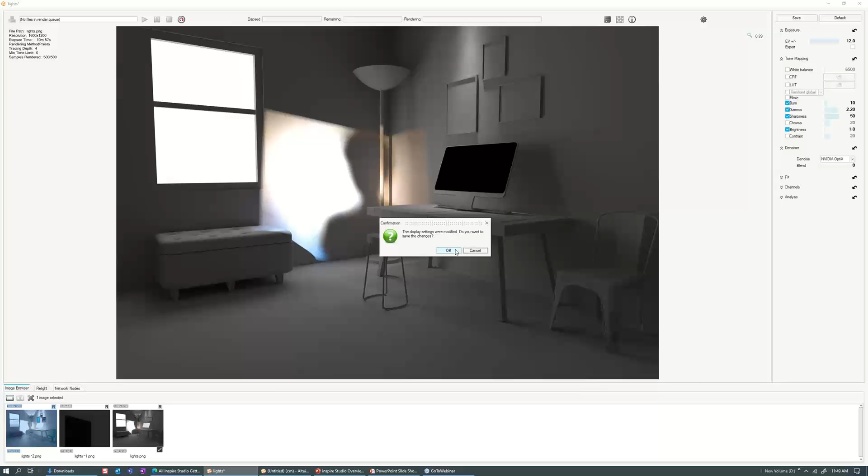And here I'm in the image browser. Let me load that other scene back. Whenever you make changes, it's going to ask if you want to save it. You can save it, or you don't have to, it's up to you. But now I'm going to load that image with the materials here, and I will show you some of the features in the darkroom that are like post-processing.

The reason why I'm showing more of the darkroom is if you were part of the other webinars, I covered rendering and other options a lot. So I just want to focus a little bit on darkroom because it's very, very effective, and it's a free program that comes with Studio.

So it's very powerful. Here I have this light, and I can turn on expert mode, wherein I can increase the ISO. Right now I have 300, by default it's set to 100. You can turn on white balance if you feel like your scene needs something, and you can also do some glares and vignetting. Most often these were part of post-processing, like you had to take the image into a different program, like Photoshop, but here you can do pretty much everything inside Studio.

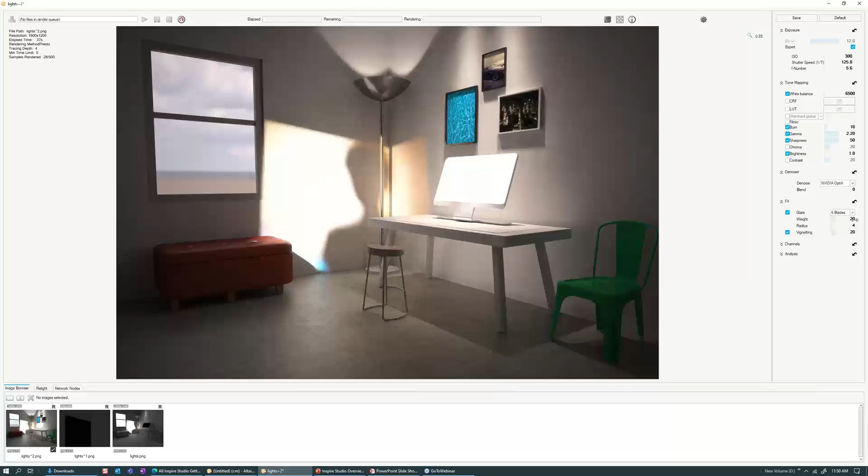So I've added all of these, and I can just save this image now as a new file with all of these changes. So the darkroom is very, very powerful, and I'd really encourage you to try it out.

So I want to give some time for people to ask questions if there are any. There is also a drawing mode that I really did not have enough time to cover, but I can quickly do that now.

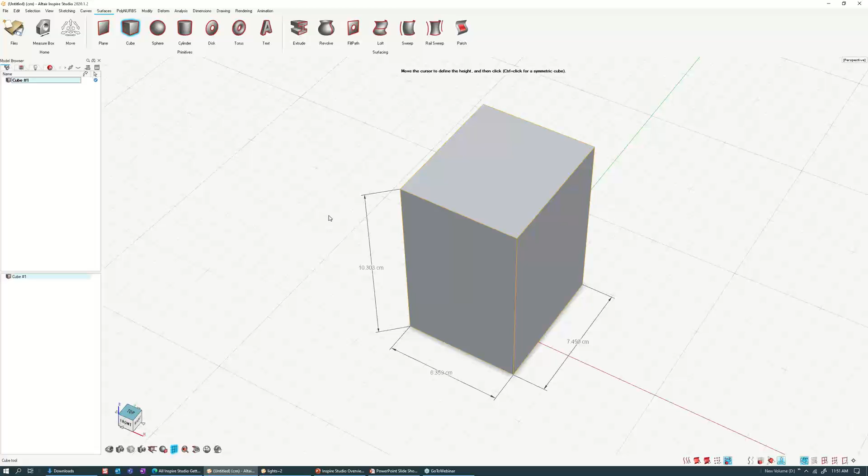Let's say that I'm just going to start with a simple object. I'm going to do a shelling of this one. Let's just quickly jump into drawing. Here in drawing mode, you can add a view set for a particular object and place it in the view, and you can add child objects by clicking this arrow here. I'm not going to add a child view. I can even add an isometric view like this one.

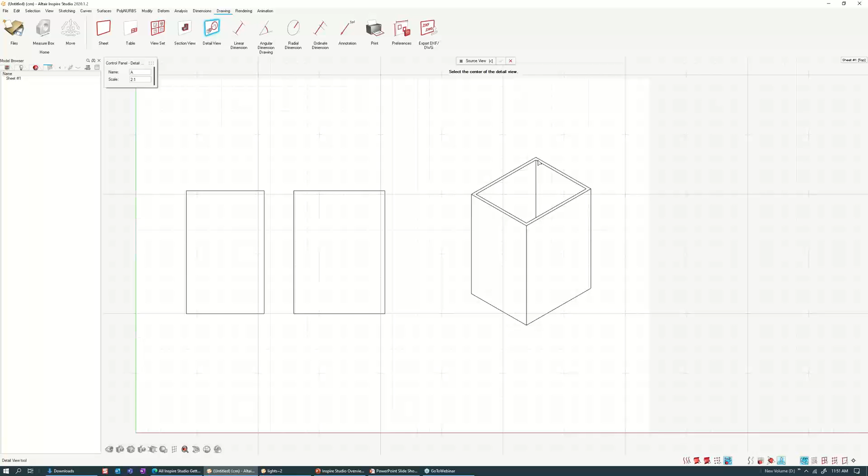Let's see, if you want to add a detail view, I can select which point I want, zoom in on that point, and place a detail view here. I can even add a section view, so I go to section and select one of these as a parent, and it'll give me a section view that I can place.

I just wanted to make sure I at least showed some of these, because it will take its own webinar to show everything. Make sure you look at YouTube, because I'm going to be adding a lot of tutorials and small run-throughs of all these features, and it'll give you a very good idea of how to use and where you can leverage these.